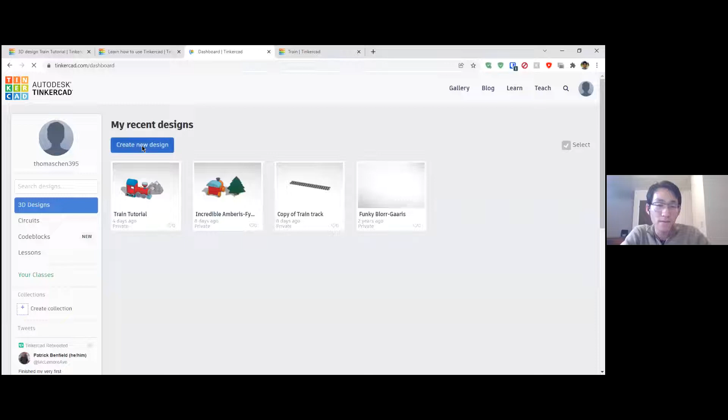All right, so you just click create a new design up here, and you'll open up with a workspace with a project title, which you can change later.

On the side here, you'll see a bunch of shapes, and these are essentially our building blocks for our model that we're going to decompose and use to put together something else. We have 3 tools up here.

This is the comment tool or notes tool, to add little notes wherever you need to. This is the ruler tool, which allows you to essentially dimension parts, so you can label the specific lengths and widths of parts to get accurate measurements. And this is the work plane tool, which defines the plane that you'll be working in.

Over here you'll see this 3D cube, and this just defines the plane. So if I click on this side, I can move to the top, switch to the back, and move to the bottom. Essentially it defines your model in 3D, and we can go back to the home position, which brings us back to our original view.

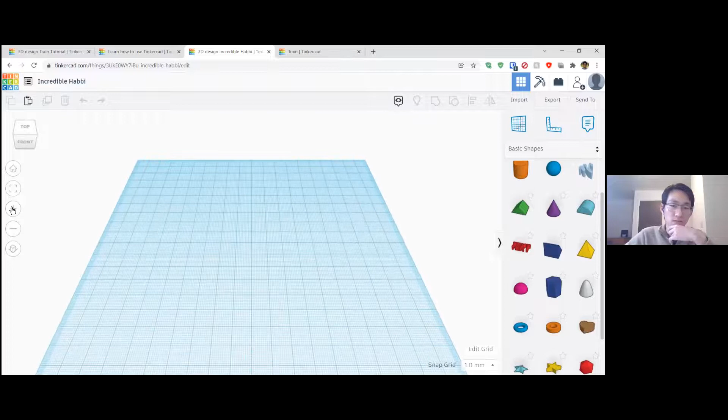Now we can zoom in using these buttons as well. If you have a mouse, it makes things a lot easier. You can hold the right click and it'll rotate the page. If you hold down the middle mouse, it'll move the plane. And if you just do your regular left click, it selects items.

If you're using a touchpad, it becomes a little more difficult. Two fingers is scrolling, so if you're moving your fingers up and down on the trackpad, you can zoom in and out. If you're holding shift and right click on your mouse pad, you can move around the work plane. And if I just hold the regular right click, I can rotate. As usual, left click is to select.

So that's just the general form of how you can use the interface and move around, essentially like a 3D world or map, of the model that you're going to be working in.

So I'll start off by, for anyone who's following along, we're going to essentially be following a methodology of breaking down a complex thing into different shapes.

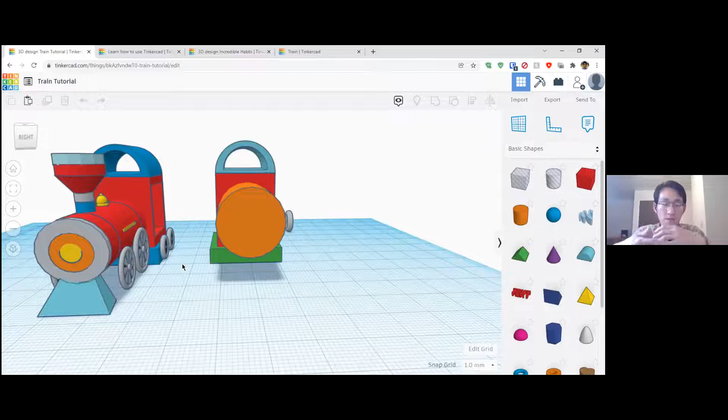So if we see here, this is a train, which you can download from the model I had earlier. It's made up of a few key components. We can see a rectangular prism in the back. It has this curved arc on the top, and we can see another rectangular prism on the bottom.

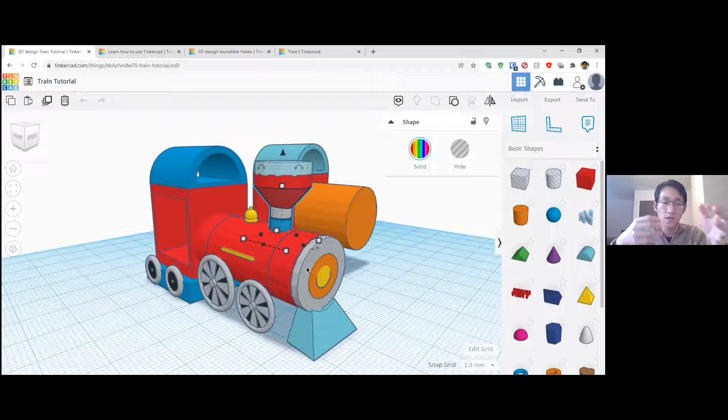And this main part is composed of a cylinder. The smoke pipe is made of cylinders as well as a cone with the top cut off. So these are all shapes that we can make and break down. We can break down this really complex model into simplified shapes that we can use to create this train.

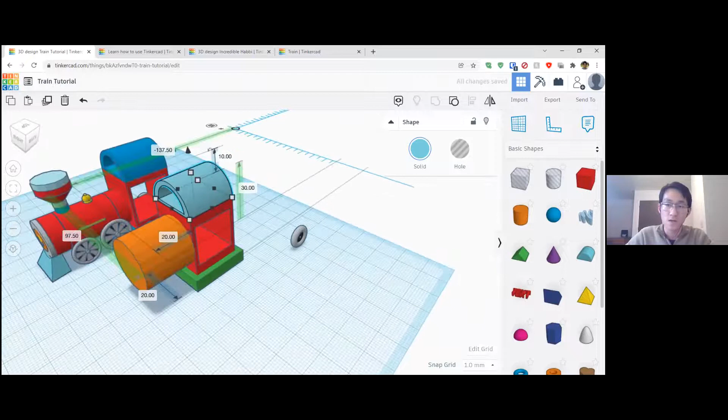So I'll start off by first using the measure tool just to make sure I know what dimensions things are. If we click on a model with the ruler tool enabled, it'll give us all the dimensions. I can select it and click on something and it'll tell me the heights and widths of parts. If I click on it again, it disables it, so it goes back to its normal shape.

So what we should do is we should start off. I'm going to just quickly check. This is 20 by 20 by 10.

So I'm going to start a new document and drag over this dome shape, and I'm going to specify the lengths of this object. I'll click on the ruler tool to make it easier. So this is 20 by 20 and this is 10, which should be the exact same as what we want here. So this is all correct.

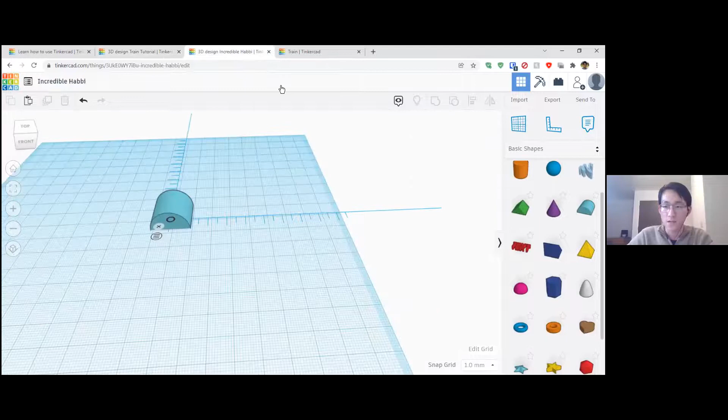We can just leave it on the work plane. Then we can start off with the red piece right here. This is a 20 by 20 by 25 rectangular prism. So I'm going to drop this here and set these distances to 20 by 20, and the height should be 25.

And then I'm going to move this somewhere in the middle so that I can easily access it. I'm actually going to minimize this so I don't see it. Okay, and then I can drag it over and place it somewhere near on top of this, and then move it back a little bit.

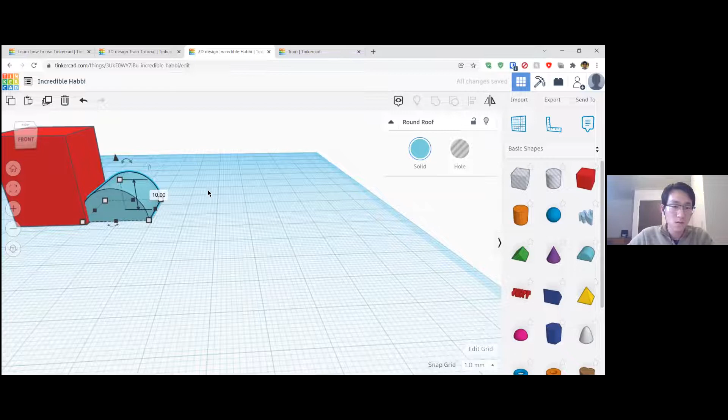Using the work plane tool, we can actually define an area where we want our planes to start at. Let me make this a bit easier to see. To edit parts, you have these little dots that I can click on that stretches things. You can move it out and it enlarges the shape. You can click on these and this will make the height higher, and you can also click and drag it around the plane.

But if you want to move it up, you have to click on the arrow right here, and this will allow you to bring it up in position so we can put it at the proper height.

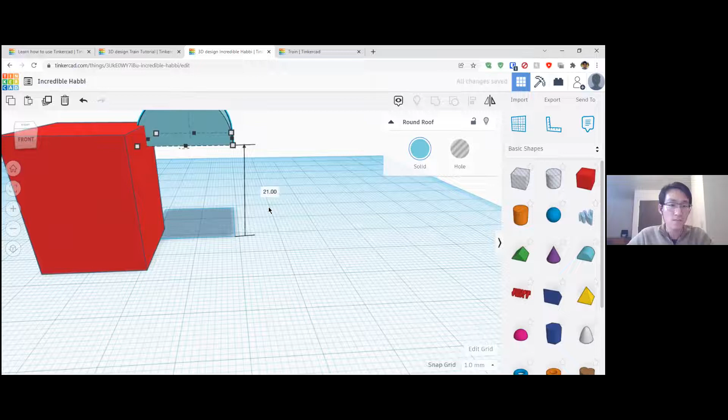So I'm just going to go back to the original model and take a look. This shape right here is a 25 by 25 by 5. So I'm going to start. Okay, how do I close the top bar? I can't see what I'm doing. Okay, so I'm going to do a 25 by 25 by 5 shape on the bottom.

So I'll start on the base and work on clicking on the ruler tool again. We're going to click on this and make sure that this dimension right here is 25. We're going to make sure this dimension over here is also 25 and that the bottom is 5. So this height right here is 5.

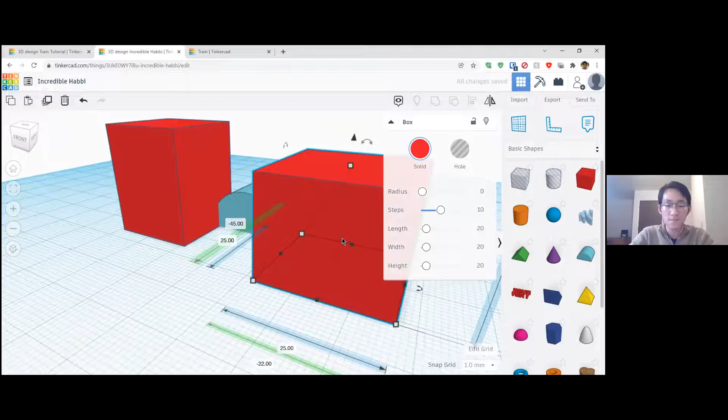And now here's our base, and we can give it a nice color. Something like green would be fine. Then we'll move it into somewhere around the center just to give it a nice position to stay at. And now that we have this shape, we want to put this shape on top of here.

So what we can do is click on our work plane tool. You can click on it, and then we can select this top surface as our work plane because we want to put this red rectangular object on top of this one. So we'll click on this, and then it'll move the plane up to this field, as you can see. So it's on top of the surface now.

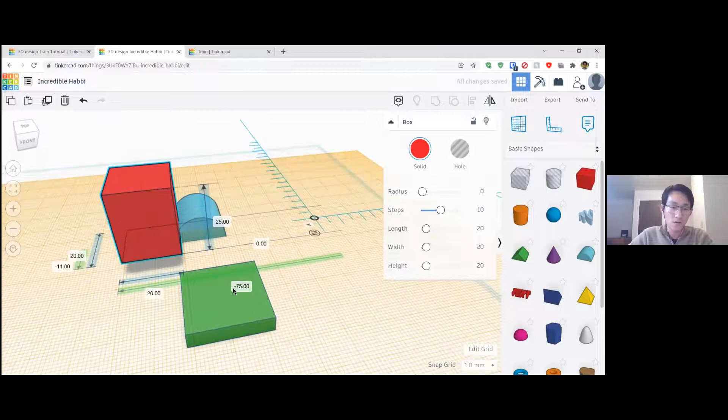We can drag this up, and you'll see the height go from -1 to 0, so now it's perfectly flat on the plane. Then we can move up and drag it onto this board. Now we want to align this so that it's properly centered.

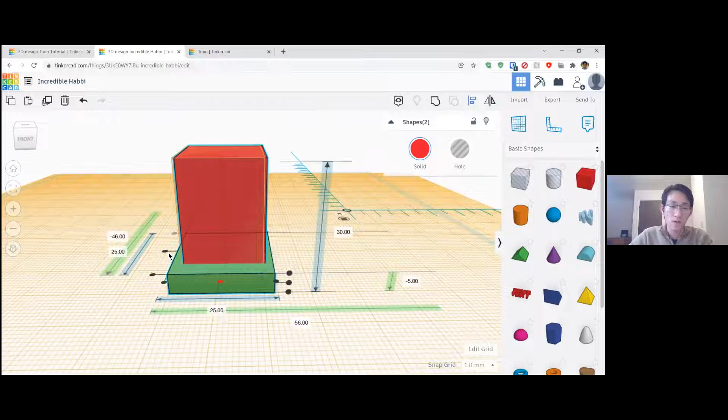We click on the first object, hold shift, and click on the second object. Doing so brings up this option to align the two objects. We click on this tool, click on the bottom shape, and align in the middle and in the center. Now it's perfectly aligned right in the center of the shape, so these two shapes are perfectly attached to one another with the centers aligned.

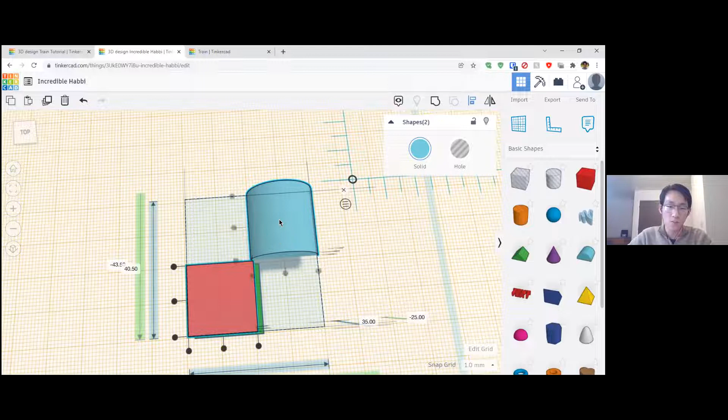We're going to move this part and change our workspace again. We click on this top surface, and bring this shape up until this height becomes 0, because we want this to be flat with the top. Now that it's at 0, we drag this over and do the same align trick by clicking the align tool and selecting this surface, because we want to put this blue part on top of here and align it in both directions so it's centered appropriately. So now we have our general shape.

I'm going to click on the work plane tool and drag it out, and just click somewhere out. Drag it out, and now it's back to the original work plane that we started with. So this is our ground floor.

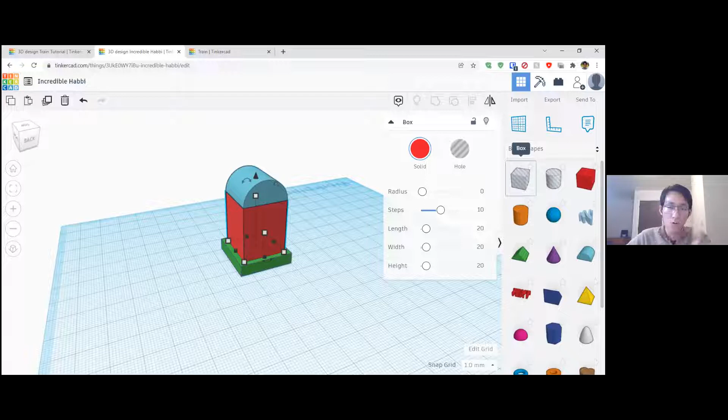Now we can start working on some of the other elements. If you notice here, these two parts have holes in them, which means we need to remove or subtract some part from the shape. To do that, we can add another shape to this shape that will allow us to cut it, putting a shape inside that can act as a sort of cut or hole, as you can see on the screen. I'll drag a shape in like this, and this one is textured, so it's considered a hole.

If I put it at the center, I'll go ahead and align it with this shape. So I'll select both of them with Shift, and make sure both are aligned. I'll click on the surface and make sure this is here, and this is here, and this is here, so it's perfectly in the center.

I can scale the shape, and then expand it in both directions by holding Alt. If I hold Alt, you can see both sides expand in the same direction. Now I want to shrink it on these sides because we want to create the hole, so I'll click on it again and shrink it like so.

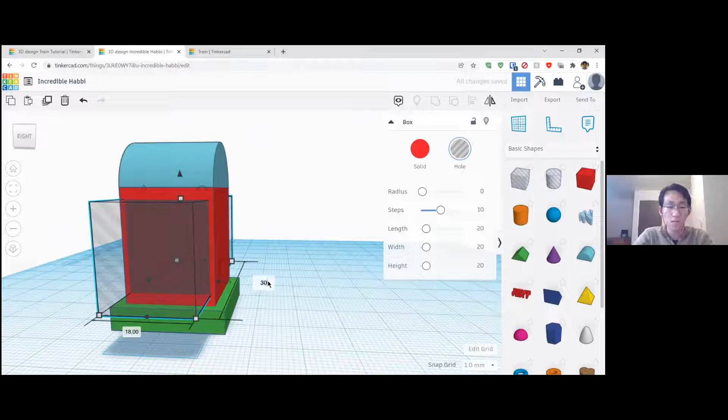We can make these dimensions something reasonable, like 18, and I can make this probably around 30. Now when I group this object with this object, and group these two together, you'll see it automatically cuts the hole out of the shape. So we've combined two shapes, one considered a hole and one considered a solid object, and now the inside is subtracted, which is what we want.

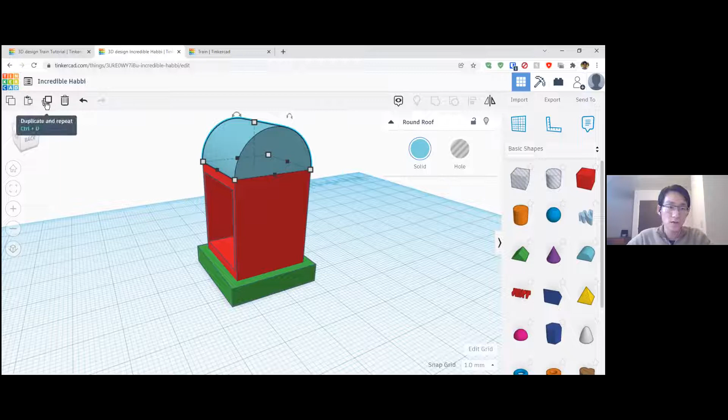Now, to do the same thing for the top, we can make it even easier. We can just duplicate the model, so now there's another one on top, as you can see. I'm going to scale this model down, first expanding in this direction because we want to cut out the inside, and then scaling down center-wise.

I'm going to click on the center, hold Shift so it scales properly with its dimensions, and make it smaller. Then I'm going to move it up about 1 so we can get a little bottom part there, and scale it back down because we don't need it to be so large. So somewhere around there is probably fine.

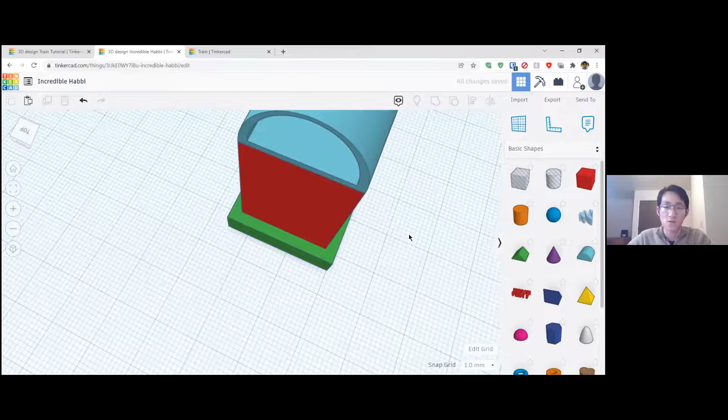And now we can designate this shape as a hole, so we're going to make it a hole. Once we group these two objects together, we cut it out. So now we have our exact two shapes that we're looking for, one with the top cut off and one with the center of the rectangular prism cut out. So that's this part, and now we can work on a wheel.

So a wheel is one of the more challenging parts of this build because it's made up of around 3 different shapes. We have a torus, which is like a donut shape on the outside, a cylinder on the inside, and then another cylinder as a sort of peg for the wheel.

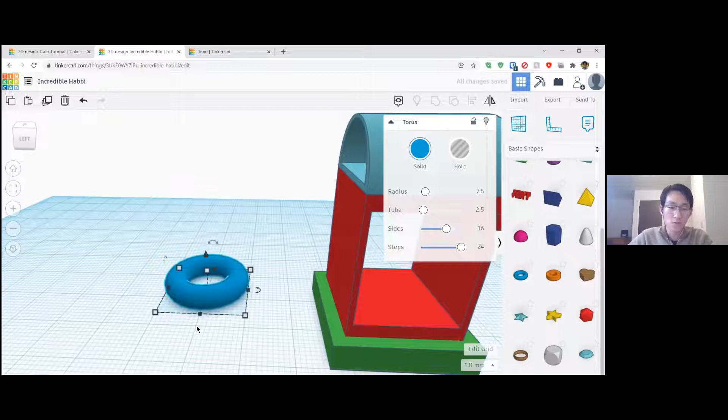So going back here, I'm going to scroll down until I see this, which is the torus, and I'm going to click on it. We want this to be defined as a solid, but it's currently a little bit too large, but we can always scale it down afterward. It makes it a little bit easier if we work with the larger size models.

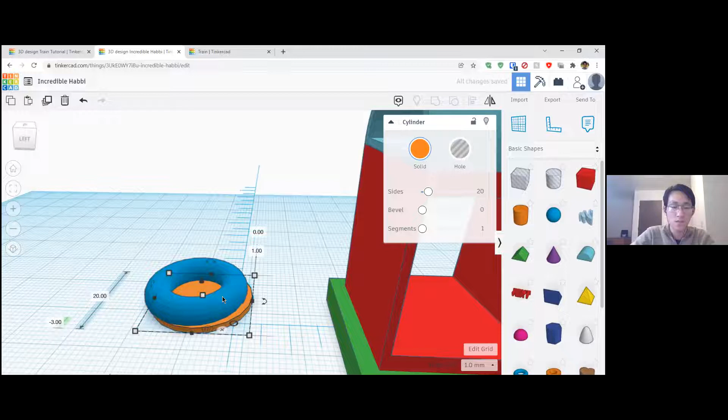We're going to go ahead and drag the cylinder in, make it a little bit smaller. So the height has to be around 1, I believe, and then we want the other dimensions around it to be smaller than the size of the torus. So I'm going to make this 15 or so, and then make the other side 15.

All right, I'm going to drag it across. And now that's there, we can select these two shapes and align them. So I'm going to select these two and hit the Align tool. This will allow me to align first in the Z-axis, so I can put this cylinder in the center, and then after that, I can align it in both the X and Y direction. So now it's perfectly centered, and now we have the center part of our wheel, and we need to add the middle part, which is the spoke.

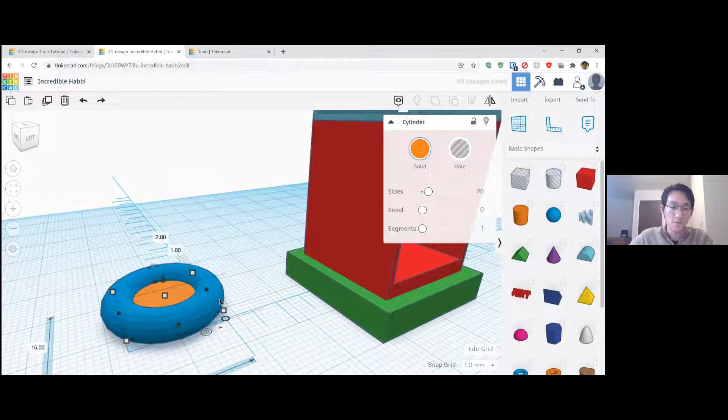So we can do the same trick that we did for the top, and we can duplicate this shape. And now it's directly on top of it. We can hold Alt and Shift, and that will allow us to scale through the center, so now it's essentially scaling to the center point. If I let go of Alt, you'll see that it's going to scale to the corner instead.

So I hold Alt and Shift, and then I select these 2 points, and then I drag this in, and now it's getting smaller and smaller. We can now keep holding Alt and let go of Shift, and then drag it out. So now we have a little spoke, and we can change the dimensions on each side. I'm going to make this around 2 and 2.

There we go. Oh, it became misaligned, but that's fine. So we'll just click on this, we'll click on that, I'll align it, and then make sure we're aligned there, and just right click it there.

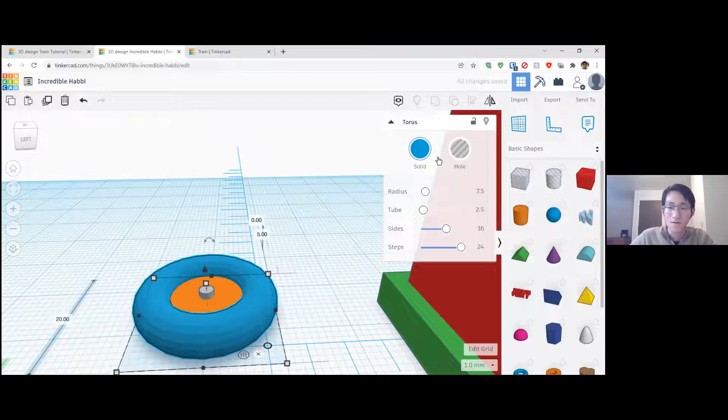All right, so now that this is centered, we're going to make it a little bit smaller because it doesn't need to be that large. And I'm going to change the shape to something that's a little more reasonable for what a car tire would look like. So I'll change the center right here, and then oh, remember what?

Okay, let's make the wheels gray, and then we'll make the center black.

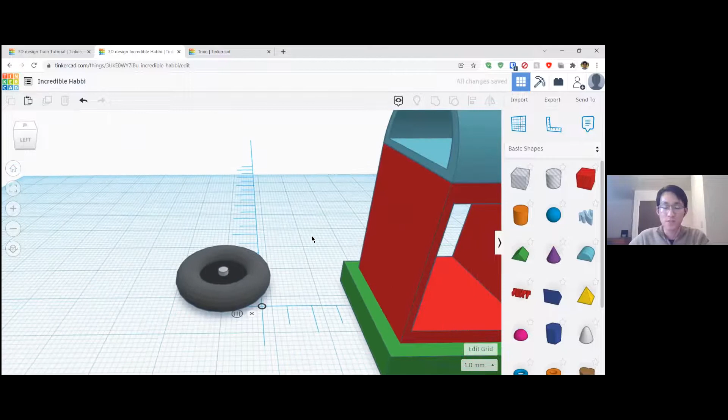All right, so now we have our wheel. And yeah, I do know I am going a little bit fast, but this is a pretty long tutorial. So I just want to get as much as I can done in this period of time, and you can feel free to pause it and watch the recording later.

So now that I have the wheel done, you can see it's a little bit large. So we're going to hold Shift and scale it down. Once it's scaled to appropriate size, we'll actually make it a little bit smaller. We can rotate this surface 90 degrees, since holding Shift allows us to move in 45-degree increments.

So now I can move it to a 90-degree position, and select all of this and just drag it over to somewhere around here. So we'll keep that for there, and we'll actually sort of put it in a better spot once we've designed everything else.

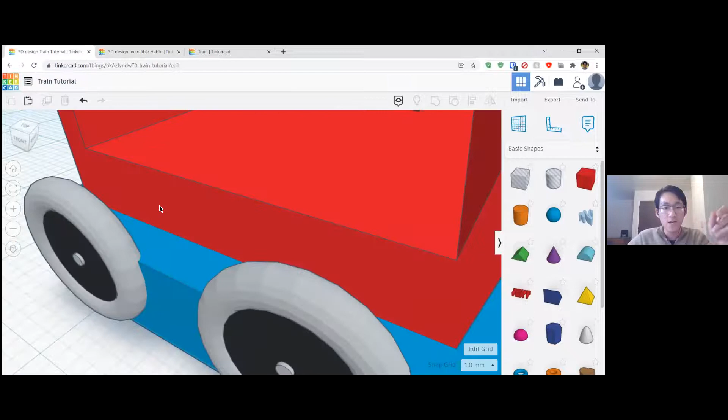So this is the initial part of the back end of the train. We're done with that, and now we can work on the front. The front composes mostly of just one single cylinder, so we can make that pretty straightforward.

Going over here, I can click on the work plane tool and select the surface, because we want the cylinder to start off on this base surface. Dragging it up, you'll see that it matches perfectly with what we want, and it fits right there. We can extend the length, so we can make this around 30, maybe a little bit longer. 35, we'll do 40.

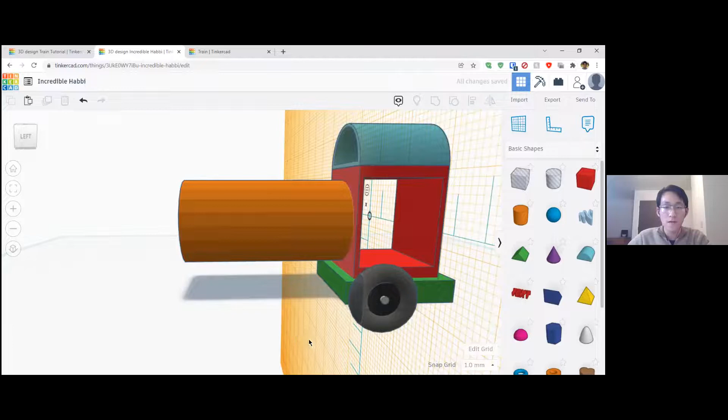It's not aligned to the center of this red sort of prism, so we can select both, click the Align tool, and center in the middle. We can put that in the center there, and then drop that somewhere over there. Oops, I don't want to move that, so I'm going to click on that tool, make sure it's aligned to this surface, and then click on here, and then click on here.

So make sure you clicked on the right surface that you want next, you make sure you define the surface that you want to move and the surface that you actually want to stay in the same position. Now it's perfectly aligned, and I can go ahead and click on this and drag it out.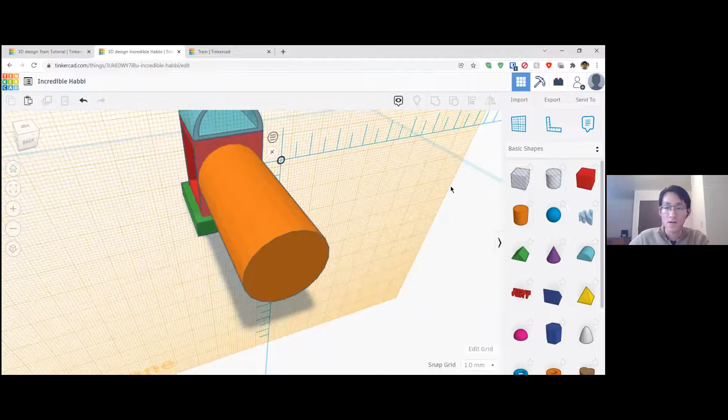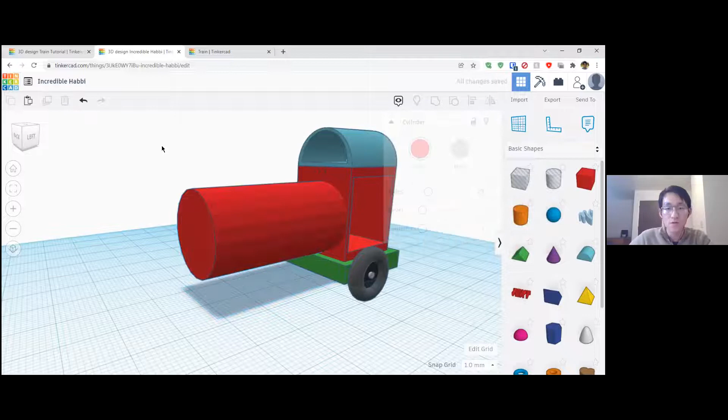So we move our workplane back to the original plane. Actually, I'm going to drag this down a little bit just so that it fits nicer as a train. I'll put it around there. Okay, and this is our sort of tube part of our train. I'll just give this the same color as the original part of the train. There we go. Now we have this main tube part of the train.

We can go ahead and add this sort of front part, which is right here. This will be essentially very similar to how we built the cylinder earlier. All we're doing is we're adding a work plane to the surface right here. We're going to duplicate this, just to make it easier. Then we're going to move it up, probably around here. Now it's zeroed, and then we're going to make it smaller.

So we're going to make this around 1, and then we'll change its color to something like gray. Then we're going to duplicate it again. I'm going to hold Shift and Alt again so that it scales while it's moving down, and I'm going to move it to somewhere like that. Then we're going to move it up 1, so it pops up.

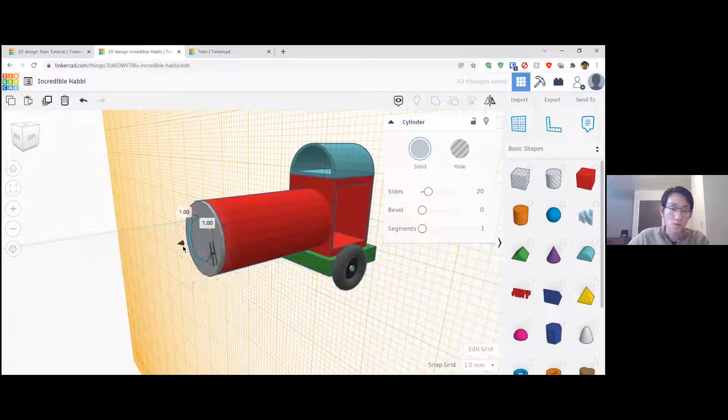Then I'm going to make this something like orange. Just to add another one, I can duplicate and repeat again, holding Shift and Alt so that it scales down. Then I can bring that part up a little bit, and make this yellow. So there we go, we have the center of the train designed.

I'm going to drag the workplane back and drop it on the floor. So we have our sort of middle part of the design complete. Now, this part of the shape might look a little bit daunting to work with because it's not really a general shape that you're sort of familiar with, but the overall design is not too tricky. It's essentially a pyramid, so we'll go ahead and drag this pyramid shape somewhere down here.

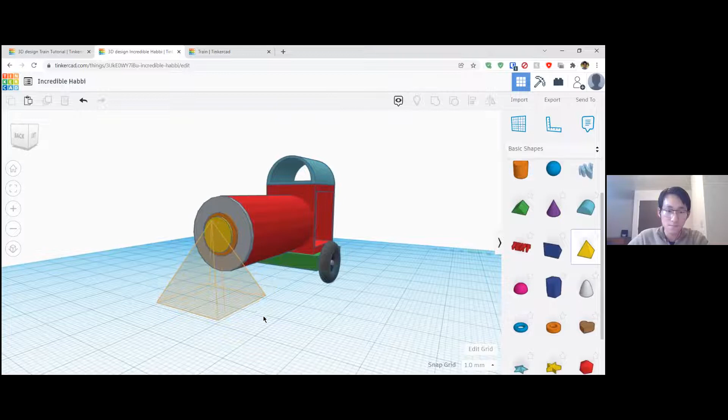We notice that this side over here is flat, so this part is flat and this part is slanted. What we can go ahead and do is click on this shape and then drag it until this part is flat, like around 5. That's flat, and then we can extend this part out to give it a little bit more of a turn.

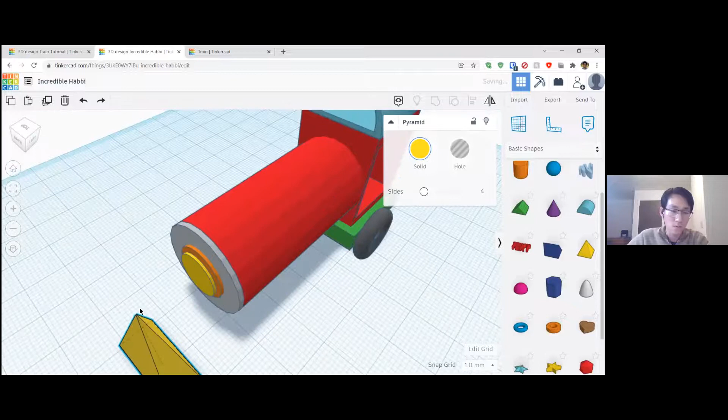We're going to move this part of the center out a little bit, so I'll bring this down actually. Then we can move this across, so I'll extend this and then we'll move this accordingly, like so. Okay, and then I'll drag this probably somewhere around there.

It's probably pretty good, I just want to make sure if I can. I think 5 is pretty good, so 5 is about all we're going to get. I'll move this across and then scale this part down a little bit, and then I'm going to move this back so that it fits in the bottom of here.

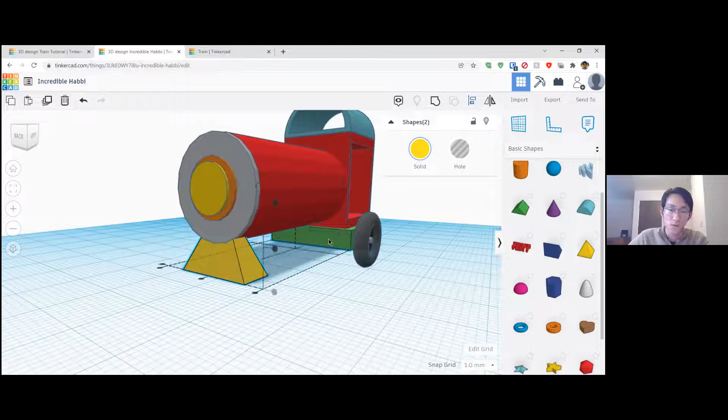And as usual, we can always scale these parts. So we can go ahead and make sure that this is aligned to something like the bottom. I'll click on this component, which is the bottom base, and make sure it's centered. I'll select this object and just make sure that it's centered in the middle right here. There we go, now it's centered in the middle of the train model.

You can also cut things out if you wanted to, but it's hidden under this shape, so when we group it all together, it doesn't really matter that the top is cut off. But if you wanted to, you could add another hole and put a cylinder on top of it to cut this top of the shape off. But because it's already intersecting with the model, it doesn't really matter.

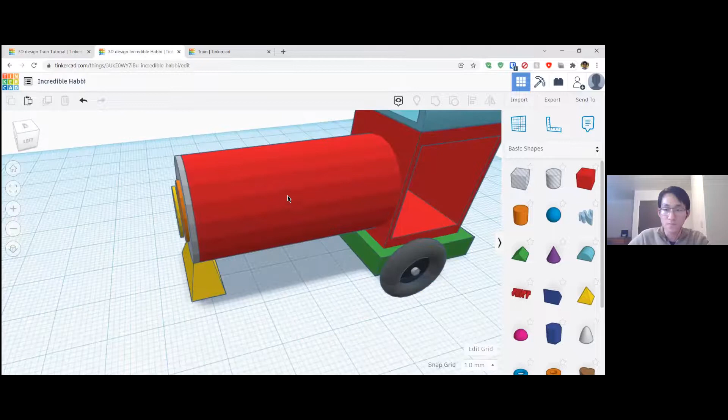So now that we have this bottom designed, we can go ahead and model the top, which is the smokestack. This is made up of 2 cylinders, but I'll simplify it and make it 1 cylinder. I'll go ahead and click on this shape and then drag it to the top.

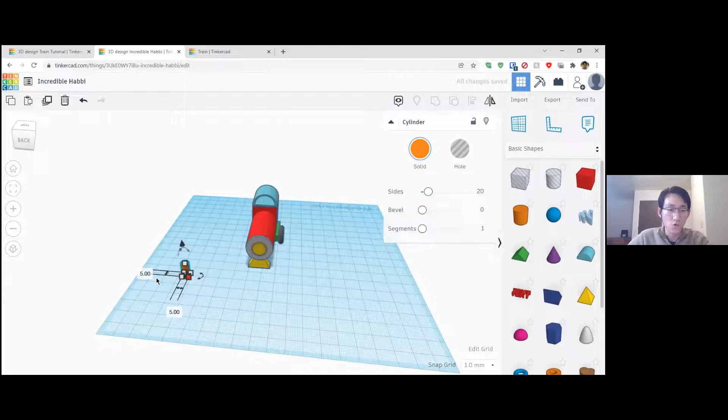Let's use something smaller, so I'll click Shift and scale it so it scales in all directions accordingly. We'll do something like 5, and we'll extend it up. Then I'll go ahead and move it to the center. Move it up, and then move it over.

Around there, and then I'll align it again just to make sure that it is actually centered. I'll click on this surface and make sure — so it is already centered. And we can just adjust the height a little bit so that it matches better.

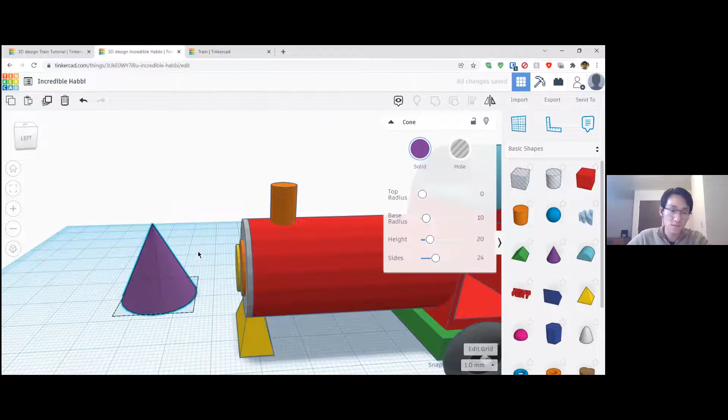Okay, so now that we have our part that's protruding from the smokestack, we can get this inverted cone. So we grab a cone and then invert it, changing the direction. We'll click on this side, and while holding Shift, we can rotate it in 90-degree increments, or 45-degree increments. Now it's at 180 degrees, and we can move this somewhere above.

Well, actually, let's scale it first, maybe around 10. And then now we can drag it back down and then move it up like so.

And to align it, we can click on both surfaces. We click the Align tool, select the cylinder because we want to move this to the cylinder. Then we click on this point in the middle, which will align it in one axis, and then align it in the other axis. So now we have this part of the smokestack done.

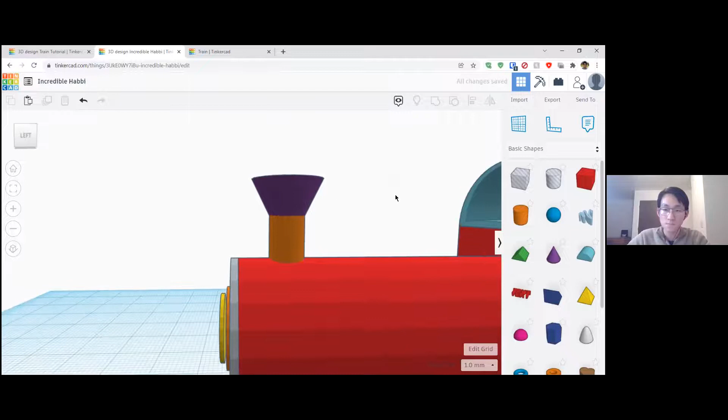And then now we want to add the top surface. Because this is flat, I'm going to click on this and move the work plane onto this surface. We're going to drag the cylinder on top and change the shape. Something like, I believe this was 10, but just to check, we can click on the ruler tool and check the width of this — so this is actually 10, and this is 10 too, great.

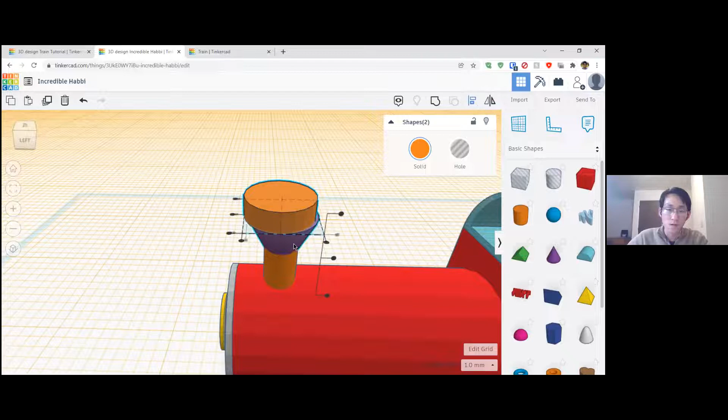So now we can go ahead and move this to the top and just match it up in position. If we can't, we can always align it, but something like around 3 and 4. I'll click on this surface and this surface, click on the Align tool, select the bottom surface, and then align it in the middle in that direction, and in the middle in this direction. So now it's perfectly above as well.

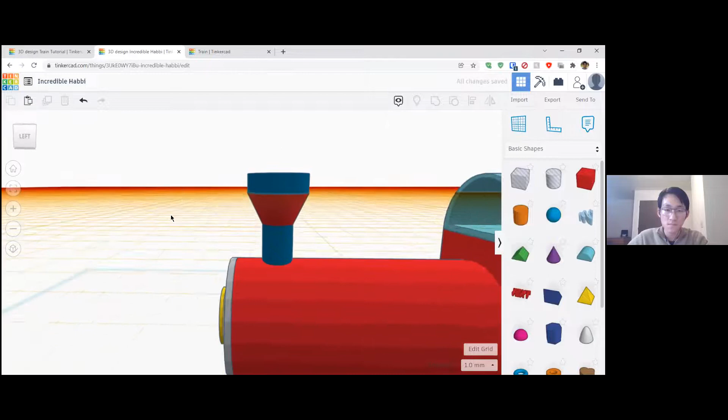And then I'll make this all the same color, or maybe make it a little bit fancy in color. Put something like this, and then grab something like this, and then like that. So that's a smokestack, and then I'll drag the work plane back to the floor and reset it. It wants me to — okay, well, there we go.

All right, so now we have the basic model almost done. This bell right here is actually designed from essentially a sphere with a torus on the bottom and a little sphere on the top as well. If you wanted to, you could design that, but these are pretty small parts, so I'm not really going to worry about that. This part is just a simple rectangular prism that I can stick on the side.

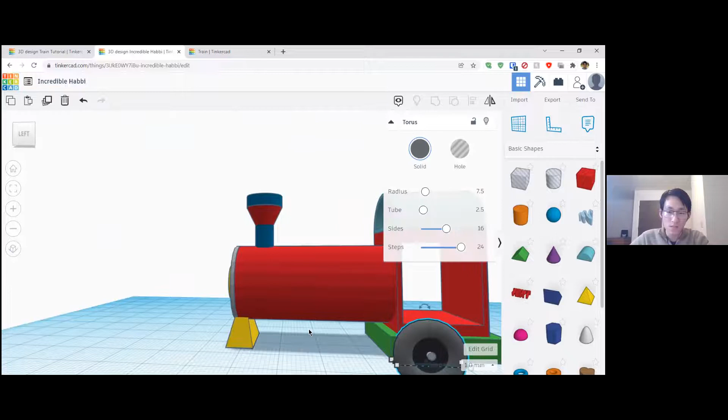And I'll go ahead and finish up the wheels. So what we can actually do is select everything here. Click on this, and then, okay.

I'll select these 3 components if it'll let me. Like these 3, there we go. I can move this up maybe a few centimeters or units, and then maybe around 2 or 3. So it's lifted up off the ground, so it doesn't seem like it's stuck on the floor, because that's where the wheels go. And we're going to move this so it's flat on the ground.

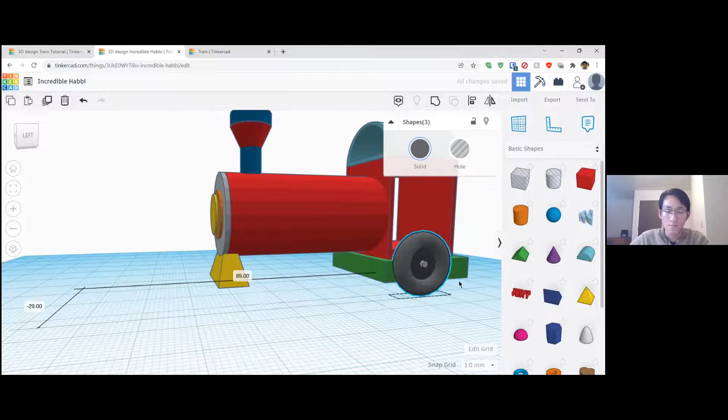There we go, and we'll move this over to around here. We'll scale it down actually, just to make it a little bit smaller, and move it across. Somewhere like here. You could put 2 wheels if you wanted to, but I'm just going to do 1 for now, just to make it simple. Put one around right there.

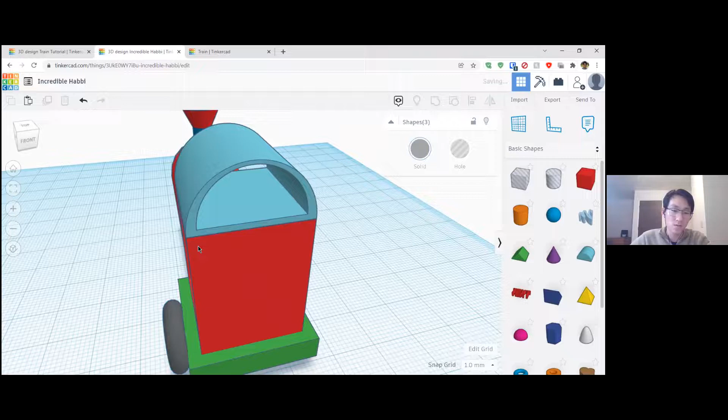Then I'm going to actually select everything again, and we're going to click it right there. Then I'm going to use this tool again, which allows me to duplicate and repeat. So I'm going to click on this, and then we're going to drag this over here so that it matches up on the other side. We can make sure the bounding boxes are about the same, so that they're in the same location. I believe that's spot on.

And then for the front wheels, we can go ahead and duplicate this again, but I'm going to actually increase the size, since the front wheel should obviously be larger. We can make something like that. Actually, scale it down a little bit. Oops, this way. There we go. Then we can move this to the front area of the train. It's probably a little bit too big, but it's probably fine. I'll move this on the side here.

And I'll duplicate it again and repeat, and we'll drag it over to the other side.

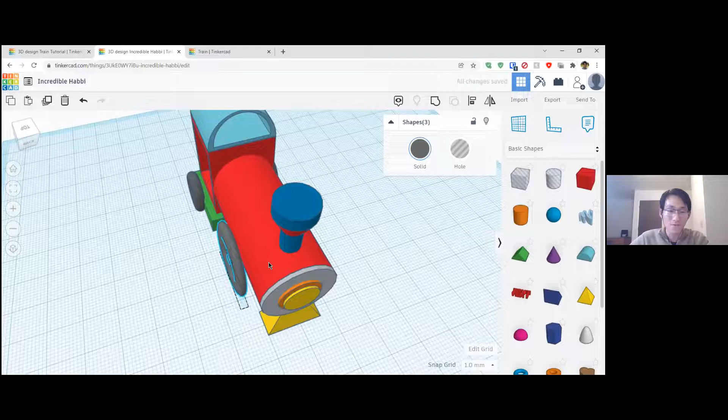You could probably spend a bunch of time and sort of fix things up, make the wheels look a little bit better, because they're a little bit large right now. But other than that, you can follow the same steps that I applied in actually putting together the train, and many of the same steps I used will be the same for what you inevitably end up doing. You can essentially find other versions of this, other tutorials that Tinkercad has, but either way there's a lot of methods for you to apply and build these designs. So some cool stuff comes with Tinkercad just to visualize your work.

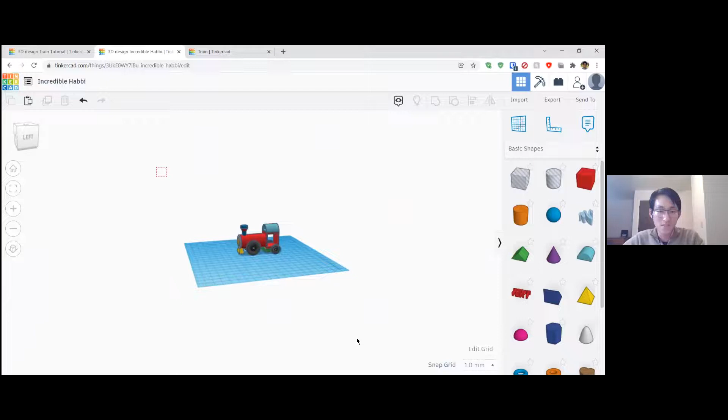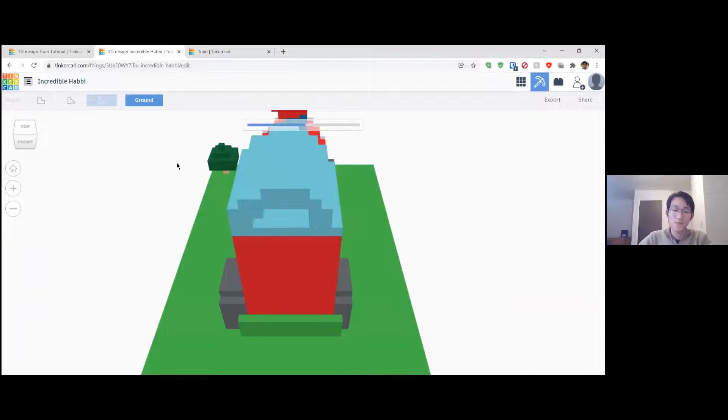I'm going to go ahead and quickly scale this entire model up by maybe up to 100, just to make it really large. You can actually drop these models inside a Minecraft viewer, so in case you wanted to build something really complex, it actually shows you the breakdown of how the blocks work. If you wanted to, you can build the entire train or whatever 3D model you create inside something like Minecraft. Or if you wanted to build it out of Legos, you can change the scale. I'm going to have it here probably be the largest, which is the most detailed, and then you can go over here and see it actually be created out of Legos, which is really, really cool.

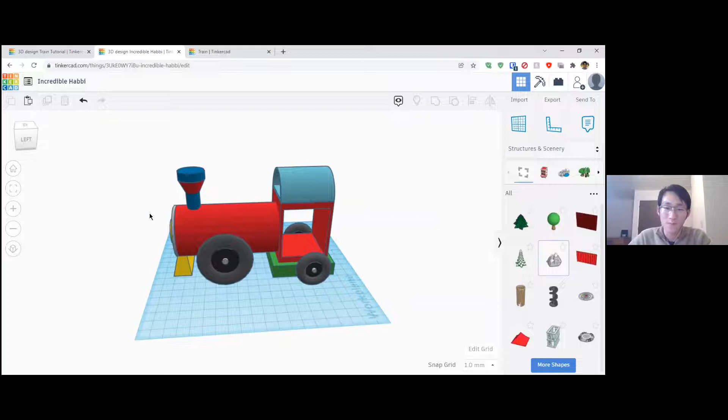So you can actually build these parts on your own, which is, in my opinion, very interesting. There are also other tools you can play around with. If you want to add train tracks, you can find a model and copy and paste train tracks. If you wanted to add a mountain or trees, you could put a mountain nearby and scale it up, just to give yourself some nice scenery around the edges so that when your train's passing by, you can see it move across.

But either way, Tinkercad is definitely more geared toward, more designed for, 3D sculpting and modeling rather than specifically CAD. But it's just a really good way for you to get started with modeling in general.

So now I'm going to switch gears and actually talk about what I do on a daily basis in CAD, and how this differs from this, but applies the same principles that you might see me use in this train design.

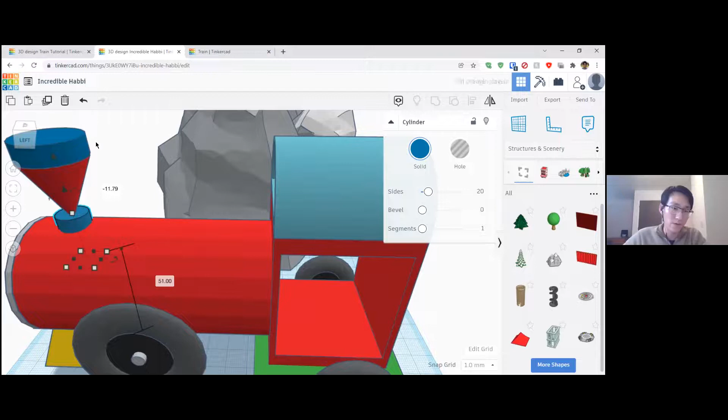Yes, it can, but there are a few caveats. Most of these models, as long as you design them correctly so the shapes are sticking together, will work. For example, we made sure this smokestack is actually inside this shape. If you put it above, and don't fully merge it to the bottom, even if there's a gap just a millimeter wide, it's not going to come out correctly. You have to make sure all of your model is connected into one piece. But 3D printing is a great aspect of that, and I'll talk about it in the second part of my tutorial. Is there any other questions?

All right, if there's nothing else, I'll go ahead and show you what I normally do on a daily basis. This is a much more advanced version of just putting shapes together.

Recently I finished an internship at a lens design company, where I was in the test engineering department. I worked on automation of systems that would allow me to test lenses. My job was to build a robotic arm that could pick up components from a tray and move them to testing stations to be used in testing the quality of the lenses.

If the lenses were of good quality, they could be moved to another station. If they were of bad quality, they'd be put in another location. So my job was to design, code, and actually build it. Let me just skip all this.

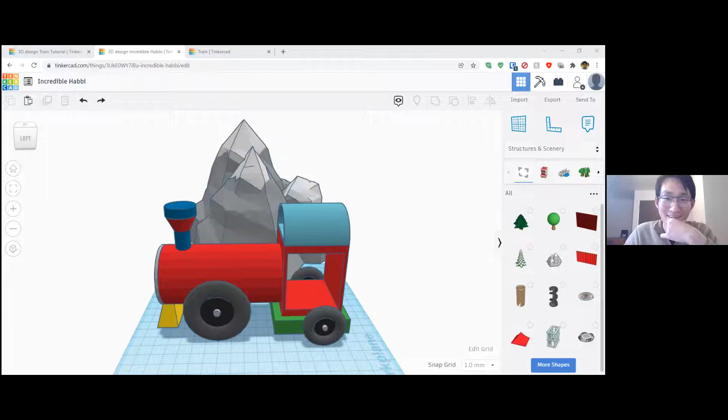Sorry to interrupt, but we cannot see Autodesk right now. Sorry, yeah, all right, okay, sorry about that. All right, so I'll share Autodesk Professional.

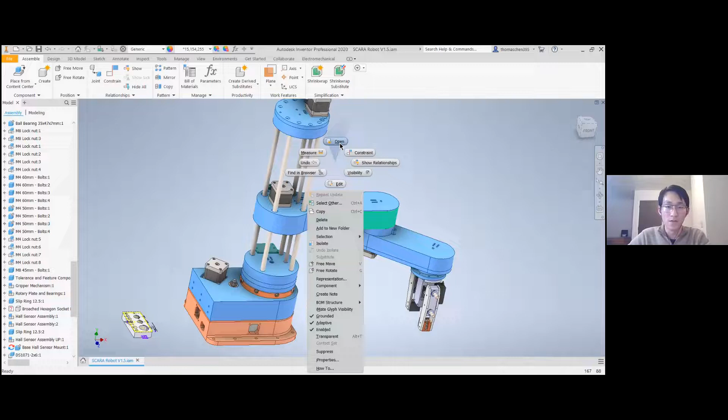This is an assembly, and I can go into a specific part and open it. You can see that this model itself is built from a bunch of little tiny parts that are created with features you would normally start with as sketches, and then build these up into 3D models.

For example, one of the main benefits of CAD is that it allows you to simulate real world applications and movements before you actually build it.

So in this model right here, which is the claw, I can make sure this is not constrained, so I'm going to set this degree to not zero. And since this is all constrained together, I can move the arm and you'll see everything moving in sync.

So this is a servo motor driving the robot arm to open and close, and you can see that in real time by me moving one of the sides. Unless I move it too far, then it breaks, but you can get the idea if I put limits on it.

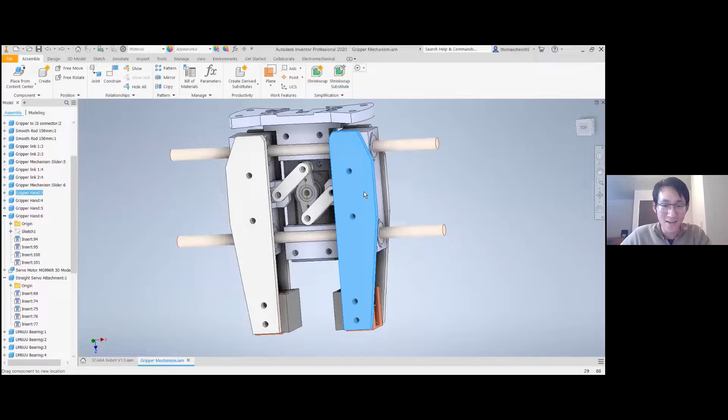This is one of the really cool ways you can graphically demonstrate something. I can go back to the model, and you can see all the nifty, specific components that go into this, from the control board inside to the fans, which are designed and modeled here, to the gears and components that do the motion systems, to the motors, bearings, and sensors that go on top of it.

So if this doesn't crash on me... nice, okay. You can also see all the mounts and other components that exist on this model. This was around a 10-week project.

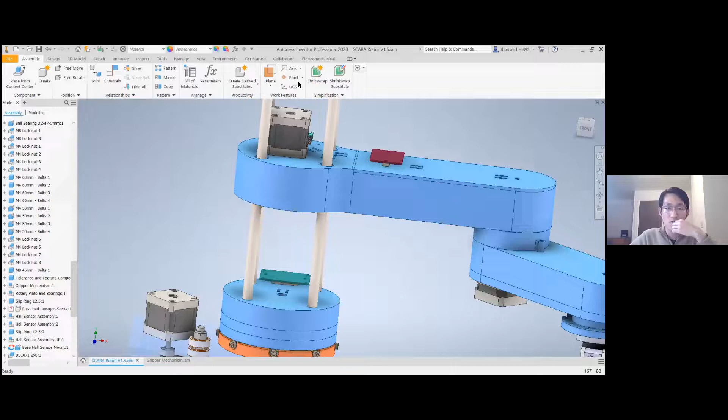The original design was a branch off from another design that I built. So the model initially was not completely built by me, but I did all of these modifications to make it 3D printable, and I'll show you.

So this is just the CAD model that I designed, but the final product was actually 3D printed. And if it'll load, which might not... give me one second. All right, no albums.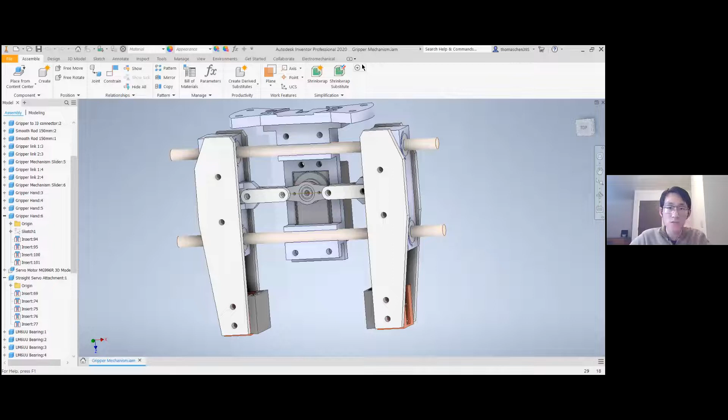There's obviously a lot of behind-the-scenes work too, like code design, firmware changes, and the manufacturing process itself—soldering, wiring, testing, calibrating. A lot goes into this, but you always start with CAD. CAD is the first thing you'll always work with, and it's a great tool that allows you to build things like this.

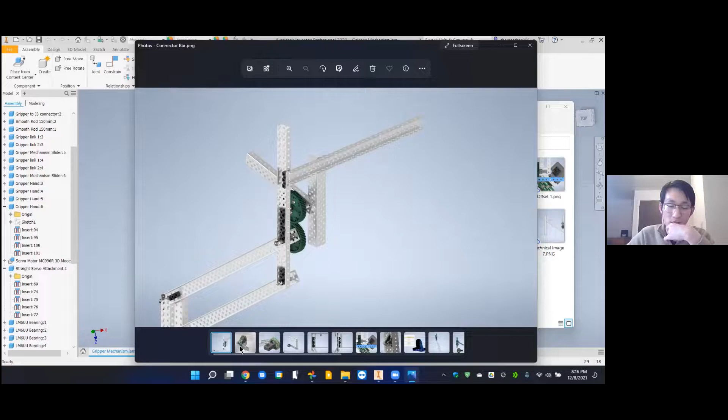For anyone doing robotics or documentation, here are some CAD models I made a few years back. It's been a while since I've looked at these, but these are some initial designs we used to build our forklift system.

This is like a 4-bar linkage, and here's an expanding wheel that we can move in and out, with the motor mount connected to it. It's very useful for documentation and prototyping, to make sure you get your dimensions right and confirm things actually work before you build them.

We have a system of gears that move together to lift the top parts, and systems where we can link parts together. It's also great for documentation—I can color-code which parts do what, and show where we need offsets, like a washer here for a part to fit properly, among other design details.

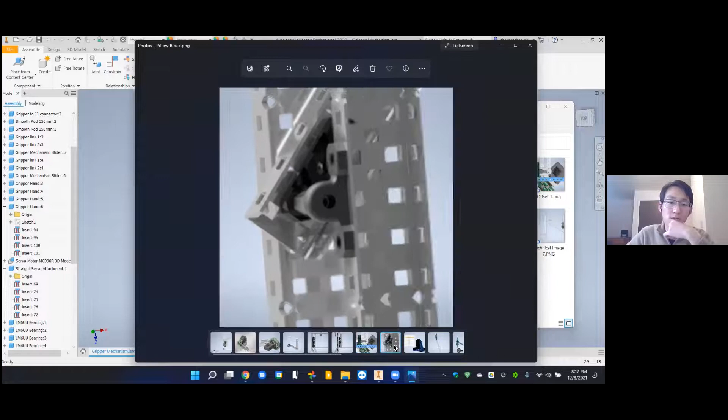This is for VEX EDR robotics—connectors and angles we need to be specific about, how much stress these plastic parts can hold, and the angle range and height extension we can get. It's a great way to work this out in software before building the whole thing and realizing it doesn't work.

Figuring out the degrees things can move, how components are oriented, and how the motors will move beforehand is really important for how your robot functions. If your robot can't do something, it's a lot easier to fix in CAD than to rebuild the entire system. So that's just one demonstration of that.

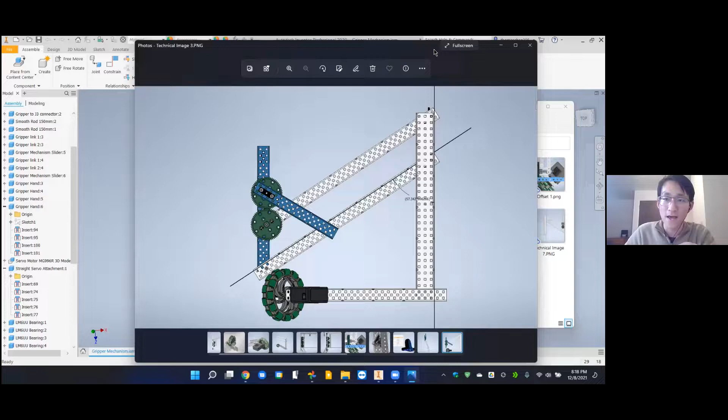Since we still have a bit of time, here's another cool thing you can do. I just created a new part, started a sketch, created a surface, and made a rectangle—a really simple part, something like 20 by 10.

I'm going to extrude this part up, give it volume—probably around 10 millimeters. So now we have this regular simple cube. You might be wondering, what's the point of this?

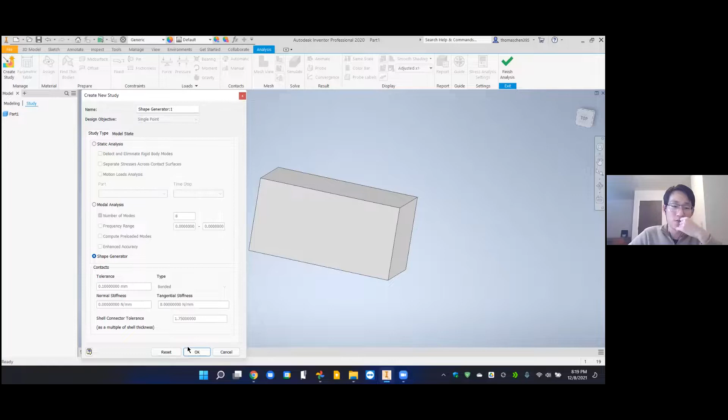Inventor also allows us to do stress analysis, so we can see how forces are applied to different shapes. This is really useful if you want to manage how force is distributed throughout an object, to make sure it can sustain a certain amount of weight. You can actually generate shapes and make things less heavy—so that's what I'll show you here, a quick demo of how you might apply this.

I'll start off with the material. I do not want it to be steel—that's way too strong. So I'll select a different material.

I'll assign something like ABS plastic, which is general plastic. And then I'll put a constraint, so I'll make this side fixed. So this side will always be, you can think of this as essentially attached to something. It's not going to move.

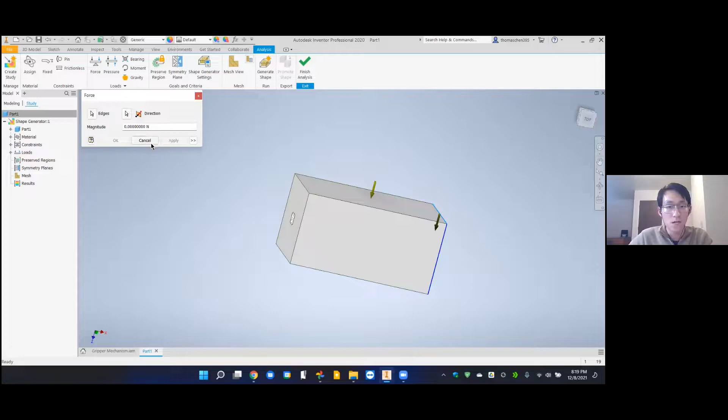And then I'm going to put a load on it. So I'll put a force on top of this surface, and I'll give it maybe 100. And then I'll put another force on this top surface right around here, in this direction, so it's moving downward, and I'll make it 100 as well. So you can think of this as essentially like a bookshelf - you have this attached to the wall, and you have some object which is pushing down on the top.

And we're going to preserve a certain region, so we're going to make sure that this region isn't changed. We're going to select about that - that's probably good. We're going to preserve another region on the top here. And then now we can go ahead and click on generate shape, and if it doesn't crash my computer, that should be great. Okay, I'm going to reduce it by around 40, and we're going to click on generate shape.

Wow, this is really cool. Yeah, this is one of the more interesting aspects to it. Most of the time you don't do shape generation, most of the time it's more building parts, but it's just something I like showing because it's really interesting to show how these programs are really advanced in the way that you can adapt stresses and forces and put that all together into one complete package that allows you to view everything about your design.

So this will probably take a little bit of time - well, probably not too long. Let's hope it runs through.

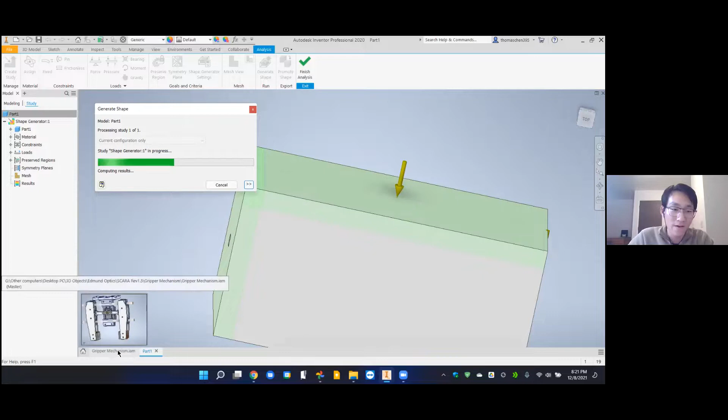All right, can I do other stuff while I'm waiting? Okay, yeah, I can. So going back to my robot arm. Oh, don't crash. All right, no problem.

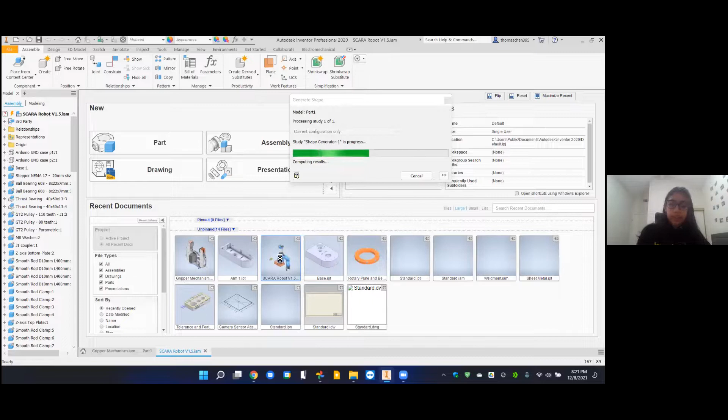I may have missed out on this before, but when you were talking about the robot arm, what's the function of it? What's it supposed to be used for? Yeah, so it's essentially using a system where there's a tray of lenses, and they all need to be tested for quality. The manufacturers have to make sure they're of a certain spec, that they're not scratched or damaged in any way, and that they're of a correct curvature. So they go into this machine and get tested. Once it's done testing, it's either rated as good enough and put in a certain pile, or it's not good enough and they have to polish it up and do other work to make sure it's finished. This process with a batch of like 20 lenses could take many hours because you're putting a lens inside a machine, it's doing all the tests, then you take it out and put it somewhere else. It's a very redundant process of moving stuff and testing things. So by building a robot arm, you can automate this and have it move to the first lens, for example, pick it up, drag it and move it to the machine. If the machine detects that it's good enough, it sends a signal back to the robotic arm, which tells it to move somewhere and drop it off as good. If it's bad, the signal will be sent to the robotic arm and it'll move somewhere else. Then it'll do all this automated process of testing for you, if that makes sense.

Yeah, wow, that's nice. Yeah, there's a lot of code behind this as well, but it was branched off of 3D printer firmware and whatever, but that's a story for another time.

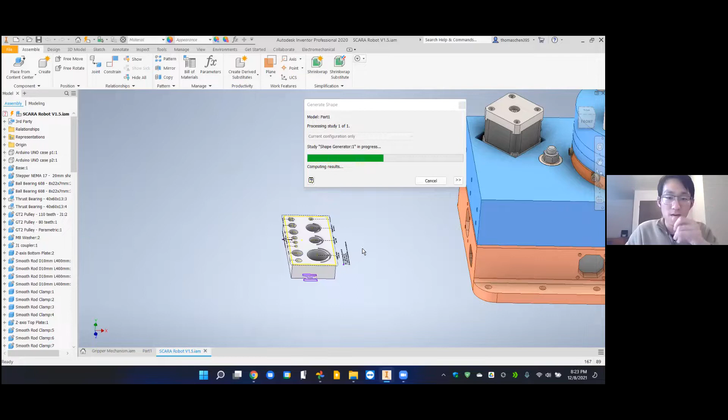Another really cool thing that CAD allows you to do is it allows you to be adaptive. So when you 3D print parts, because you're using plastic to print, plastic is not completely uniform. Depending on the type of plastic, the environment, the humidity, your plastic can shrink and expand while cooling down, and your holes might not be the right size, and your shapes might not be the right heights because either the printer or the material you're using is different. By designing this part, I've essentially linked all of these holes you see up here into the model. So all of these holes designed from the fans to these connectors are all linked to this part. So when you 3D print something, you can just print this model out, test it, and make sure all the holes fit with the right screws, the right nuts, the right connectors.

And if it doesn't fit, just go straight in here, adjust all of these dimensions, and it'll automatically update on this arm. That means when you actually go and print out this model on your 3D printer, you'll know that all the holes are the right size. That's one of the really useful tools of CAD.

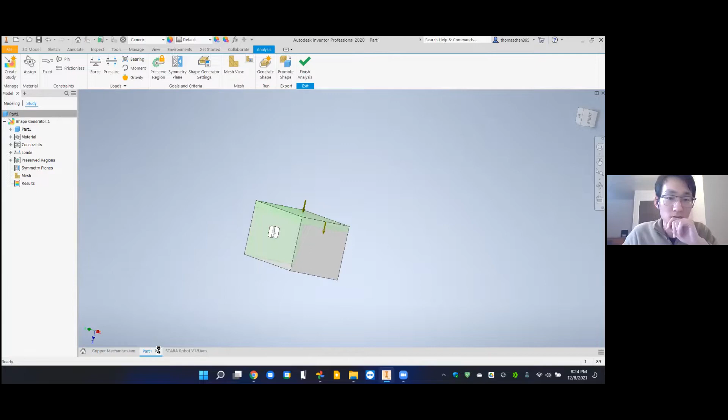So going back here, let's see if it worked. It's not showing me, so let me change the study. Study properties, and we'll do static analysis. I'll simulate it - this shouldn't take as long.

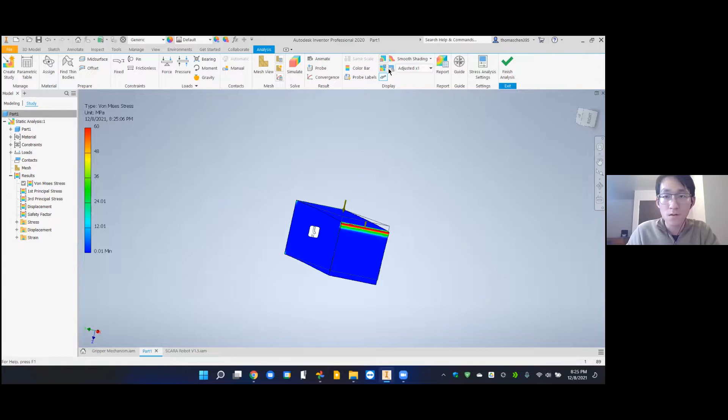So you can see here, actually let me change the range because it's pretty high. I'll move this into, let's do like 70, 60. No, I need to bring it up more, 20.

So you can see, if I apply a load to the center and the very edge, you can actually see the force distribution and how some areas are experiencing the force a lot heavier than others. If I move the shape, you'll see it bowing down from its original height, because we applied a force here, and you can see that force being spread throughout. Its attachment to the wall position is also being affected, because at this position, when it's connected to the wall, it's experiencing a lot of force downward that's pulling it apart. On the bottom, it's experiencing a lot of force which is pushing it and compacting it. You can get this very graphical demonstration of how these forces are actually interacting with your model, which is really interesting.

Overall, there's a lot of uses for CAD. Tinkercad is a really good way for you to get started and to see if it's something you might enjoy. But if you find this interesting, if you love 3D printing, if you want to build and prototype parts, definitely start with Autodesk Fusion 360, which is free for students and makers I believe. You can sign up for an account and start trying CAD out. There's many tutorials online you can follow that go into in-depth descriptions of how you can make these complex models and actually create them in real life with things like 3D printers and CNC machines and woodcutters and such.

So yeah, I think that's pretty much all I have to show.

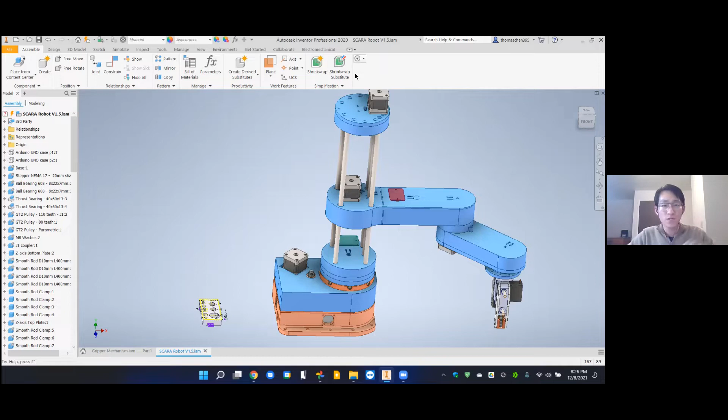I have a question about Tinkercad. Is it possible to group shapes in any way?

Yeah, so when I connected the top together, I was grouping those shapes. If I go back here, I can, for example, group this component with this component with this component and select this icon right here, which is group. I click on them and they're connected all together as one. So you hold shift to select multiple objects and click them - yeah, shift click to select multiple objects. Then you can ungroup the objects by just clicking the button again, and you can bring them back to their original form. Grouping is pretty useful when you want to 3D print parts because you want to make sure all the components are combined into one solid object.

And if it's not connected, would the grouping not work? If it's not connected, it should still work, but it might be a little finicky because the parts are technically not really together. So when you throw it into a 3D printer slicer, you might get some weird combination between parts, but you'll have to try that out - your mileage may vary. It depends.

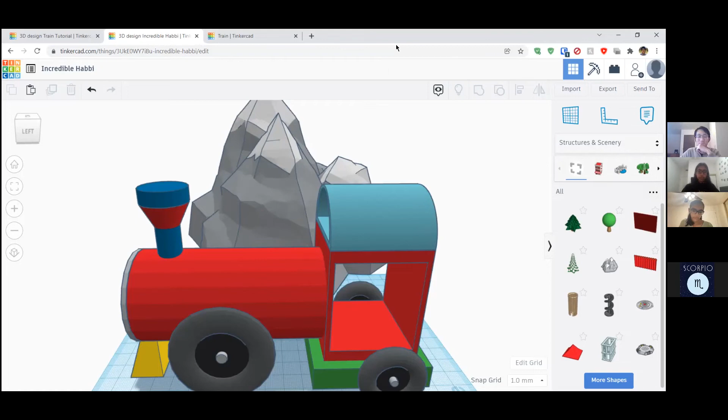Yeah, thank you so much for that great presentation and CAD project. I'm sure it was as insightful for me as it was for everyone. Yeah, I hope you all enjoyed it and got a better perspective on how CAD works and engineering in general, and how there's a lot more to it than just building the parts from scratch with your idea from your head.